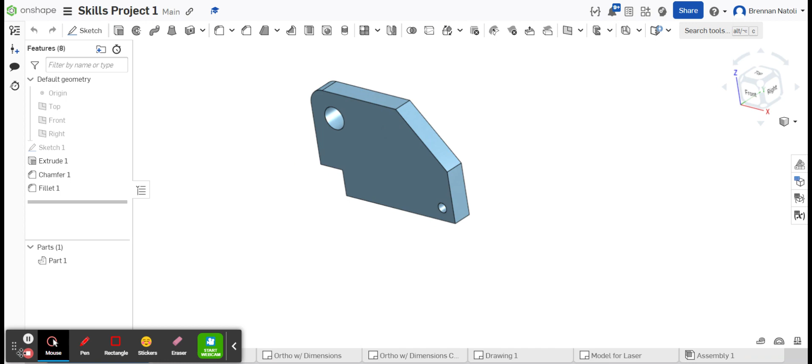Okay, so we're going to create this model here, and then what you need to do is create this drawing, just using this picture here that I gave you. So what you're going to do in Onshape is create a new document. It's called Skills Project 1. Create a new document.

Now, while we're here, we're going to reference that sheet I gave you. So we're going to start with drawing a sketch, and you're going to draw this outline. It's a lot of lines on here, but you're just going to focus on the outline of this part. So you can do a rough outline of this, roughly the same dimensions. Then we'll come back and add the dimensions after. That's how I do it. You can do the dimensions as you go, whatever's easier for you. But I'm going to start by drawing this shape.

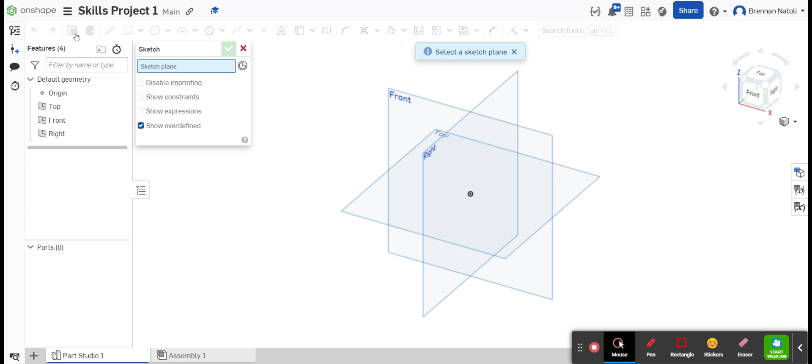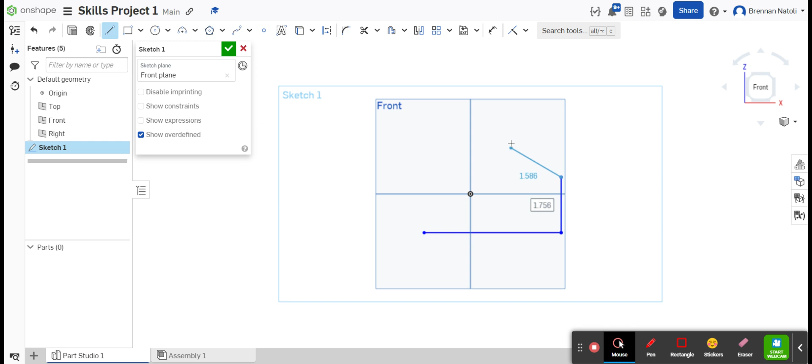So I'll click Sketch. I'll draw all this on the front plane. Use the line tool. And I'm going to start by mapping out that rough shape. Don't worry about that angle there. I'm just going to draw the shape. And if I hover over points, you'll see there's like orange dotted lines. These are going to snap in place, so they can snap into specific locations that I want them to snap into. Making sure the lines are parallel.

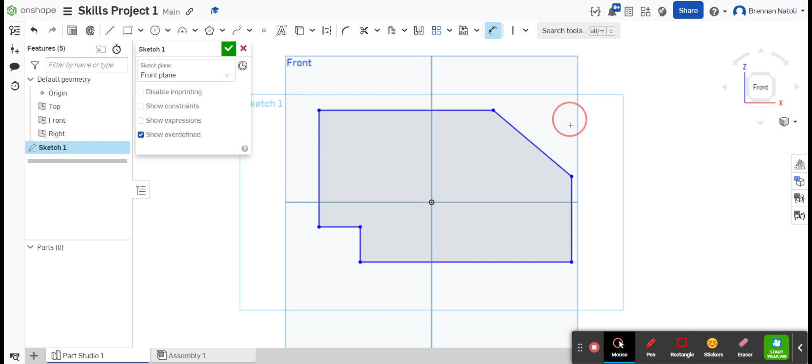And I'll hit escape. So no dimensions on this yet. You can see it's not perfect, but it's roughly the same shape as this here. Now we need to start adding some dimensions. So I will dimension this back line to this top. From here to here is 4 inches. So what I need to do is click the dimension tool, or D on the keyboard. I'm going to dimension this line and make that 4. Great. So I'm going to keep referencing my drawing.

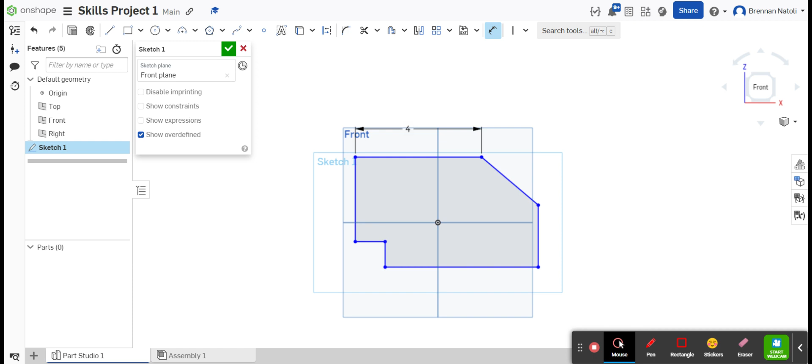So I'll dimension this whole thing. If I look at this top drawing now, it's 6 inches total length. So from this end all the way to the other end is 6 inches. So I'll go back to my drawing. I'm going to dimension this line to this line, 6 inches. Okay, so my top line is 4, and from end to end is 6. It's not this line, it's from this end to this end. The total length is 6 inches.

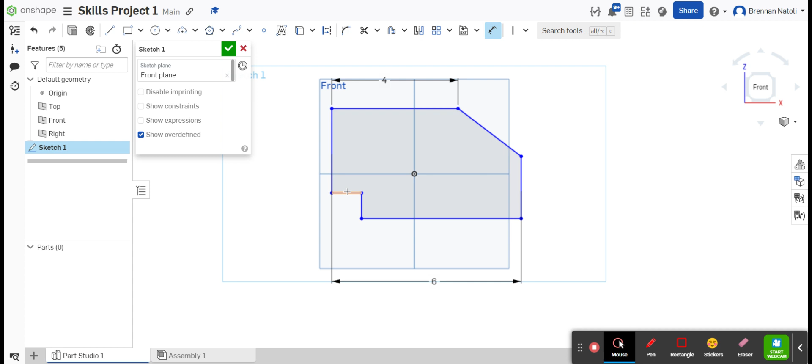This little cutout here is 1 inch by 1 inch. This little notch here. So what you can do is go back to your drawing and dimension. It's good practice to keep your dimension numbers off of the actual drawing itself. So I'll click, that line is 1. And then this line is also going to be 1. So I have my rough shape working together now.

Now, this whole thing, if I'm looking at this right view where my cursor is blinking, it's 4 inches from top to bottom. So from here to here is 4 inches. So in my drawing, I'm going to use the dimension tool again, click top line, bottom line, and type in 4. Enter. So I have my main dimensions set. There's a couple more I need to dial in.

This line on the right goes up from the bottom 2 inches. So I have to dimension that 2 inches. This line here is what I'm talking about. Click that once. That's 2 inches. Okay, there's one other line we need to dimension before we start adding the fillets to this drawing.

That's from here to here. It's 3 inches. So from this notch up to the top is 3 inches. So I'm going to go back to my Part Studio and dimension this, 3 inches. It's already set, so I don't even need to dimension that. If I did everything correctly, that number should be 3. And right now we have our rough layout. The only thing missing is our fillets on the corners, our rounded-over corners, and our holes.

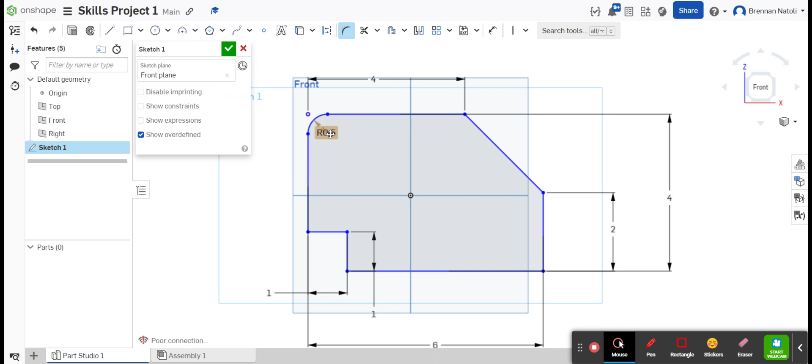And I can move this out of the way if I want. So this radius here is 0.5. So I have my outline completed. The next two things we need to do are dimension our circles. So we have one circle that's 7/8 inch in diameter, one that is 3/8 inch.

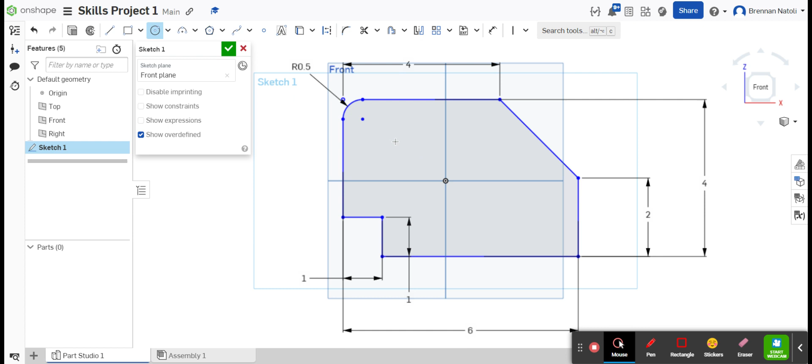This first one, if you look at it, everything is dimensioned from the center point of the circle. So this is 1 inch over from the side, 1 inch down from the top to the center of the circle. So first thing you do is click the circle tool. Doesn't matter where, just click, create a circle, click once, release. Give that a diameter of 7/8. Onshape does fractions, so you dimension that circle. Just type in 7 divided by 8.

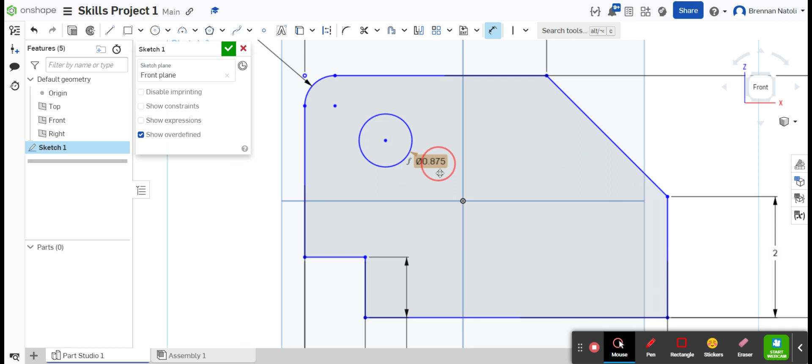Now, hit escape to break the command so you're not drawing multiple circles. I now need to dimension this circle. So I click dimension. Now, everything is going to be dimensioned from the center of the circle. So I click the center of the circle, and I click the top line there. That is 1 inch. Great. And now I click the center of the circle again. Click the side line. Bring my line up so I can read it.

Type in 1. And you can see I dimensioned my circle 1 inch from the top, 1 inch from the side. Now we need to do the same thing to the bottom right-hand corner, because look at our drawing. We have a 3/8 inch circle that is 1/2 inch from the bottom and 1/2 inch from the side. So it's the same process, just different dimensions. So I'll draw a circle again. Click a circle anywhere. 3 divided by 8. Enter.

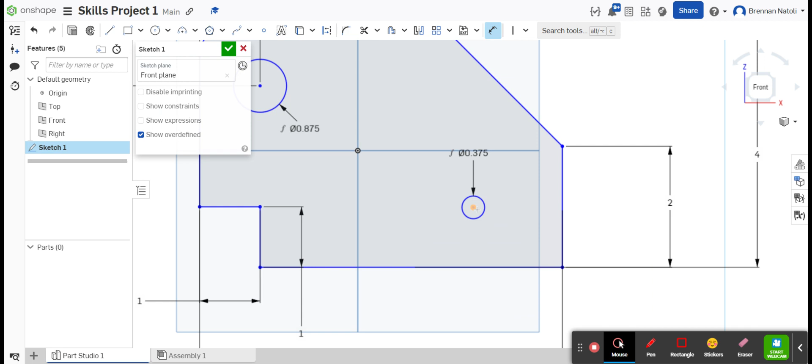Escape to break the command, or just hit D or dimension on the toolbar. And I'm dimensioning from the center of the circle. So I click the center of the circle. I click this outside line, and it is 0.5. It is 1/2 inch now from the side, and I'll click this again. It's going to be from that center to the bottom. It's going to be, again, 1/2 inch from there.

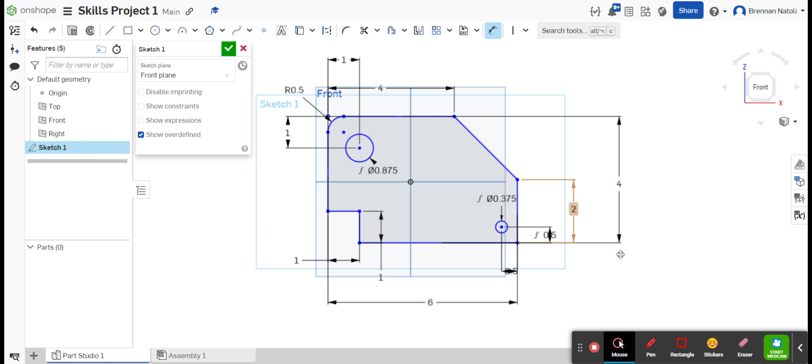And now I have my sketch. Everything's defined. Everything is dimensioned. I have my 2 circles. I have my outline. I can now accept the sketch. I'll hit the green check mark. Great. There's my model. If you need to make changes to it, you can go back into the sketch and make adjustments.

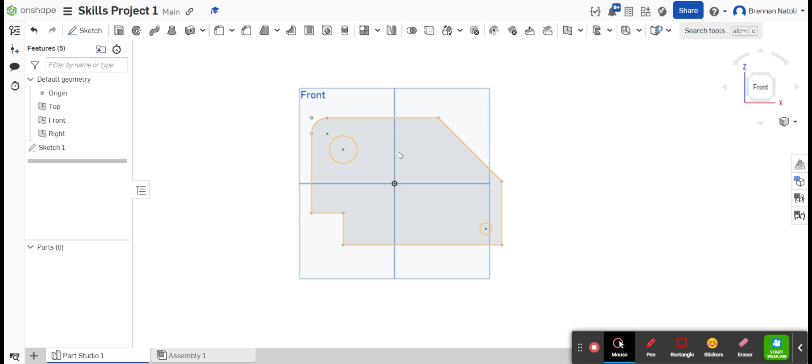Now, from here, what you need to do is create a 3D model of this. So we need to rotate and then hit extrude. And you can click the piece, and you're going to change the depth of this from 1 inch to 3/4 of an inch, or 0.75. And I have my part.

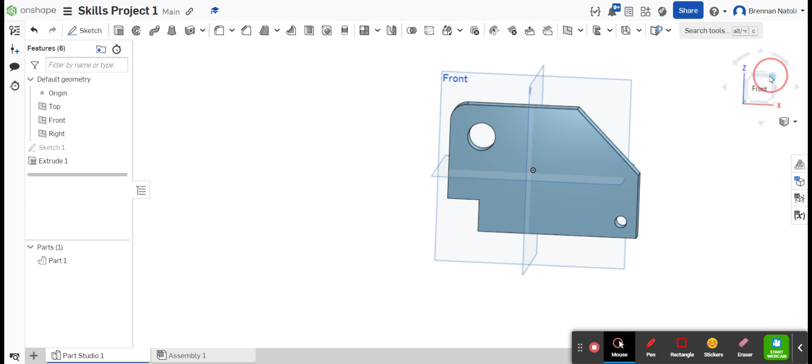The next thing we're going to do is create an orthographic drawing of that. So what you can do is you have part 1 over here in your feature tree. Right click and click create drawing of part 1. All you need to do is click the 4 views icon down here. Click OK. And it will generate the part for us. So, generated the part. Now you need to add dimensions, the same dimensions that I had. I put a lot of dimensions on it, so you can include all those as well.

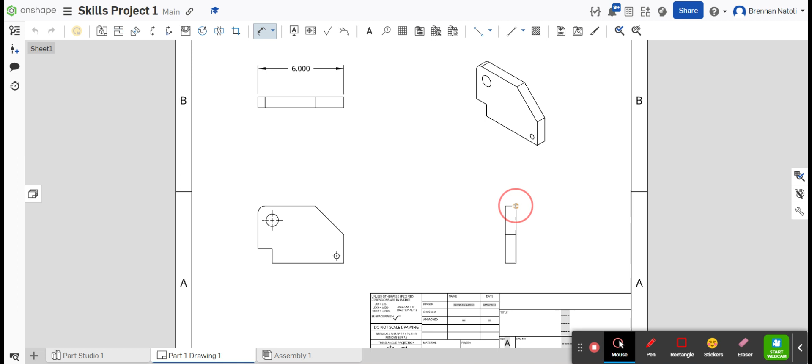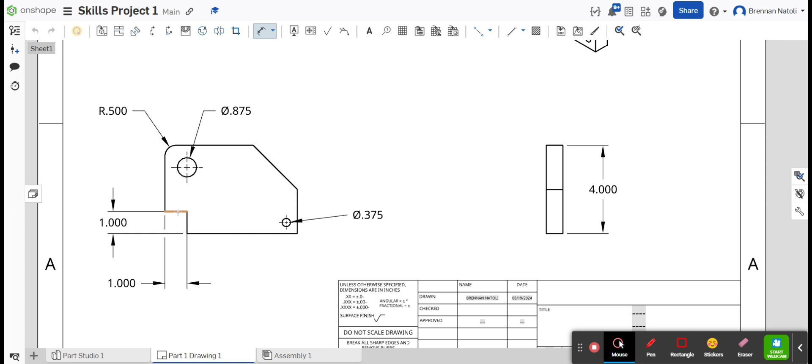So I hit the dimension icon on the toolbar, or D on the keyboard, and I'm going to dimension overall length, height, the diameters of the holes, the radius, right? You can kind of see typical practice, we don't have the dimension numbers over the drawing. So you can kind of see how I'm clicking the lines I want to dimension. I can click points rather than lines, to have all my measurements there.

And there's your orthographic drawing, and your Part Studio will have your 3D model. So you have two separate things. When you're done with this, click the share button, go to link sharing, turn on link sharing, and copy this to the clipboard and paste that into the assignment labeled as Skills Project 1.